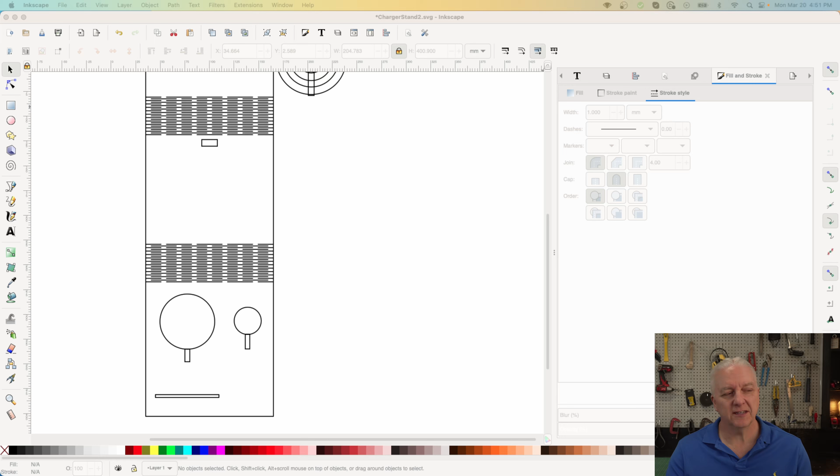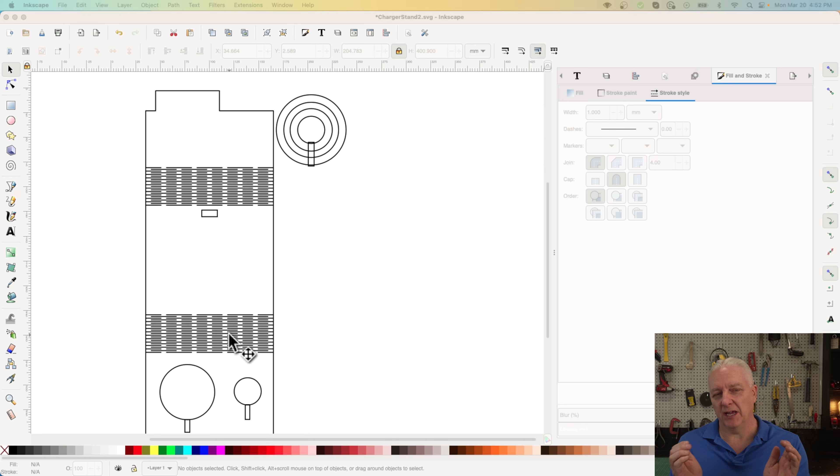This looks a little weird at the top here. This is an offset because I have my smartwatch on one side, on the right-hand side here in this case. The band kind of hangs down, and I didn't want to have this sticking out, because when you fold up the stand, this becomes the ledge that your phone sits on. So beside it is just empty space, and you'll see that when I put it together. There's a little hole in the back to run the cables through, and then there's two holes for the chargers.

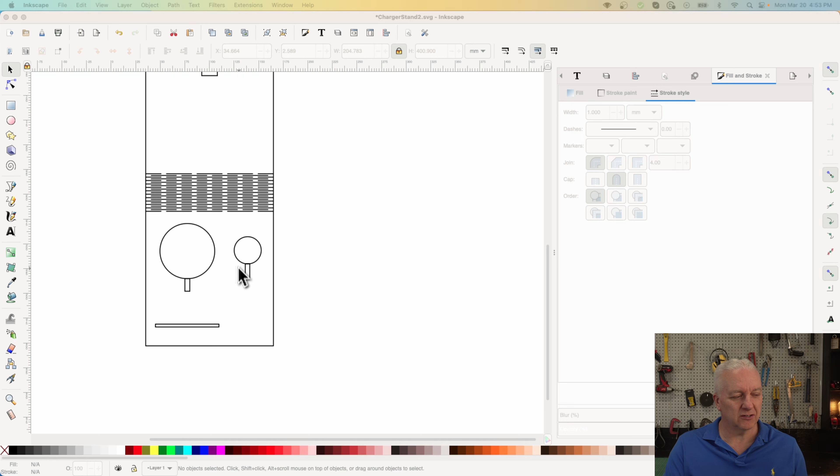In this case I'm using iPhone and Apple Watch chargers, but if you have another type of phone or another kind of watch, you should be able to modify this stand to suit. Maybe you just have it plug in the bottom, in which case maybe you put a hole here for your plug. Kind of finishing it off here is the slot that tab at the top fits in. So basically you bend at the top and you bend at the bottom, and then you slide it into the slot, and I'll show you how to put it together.

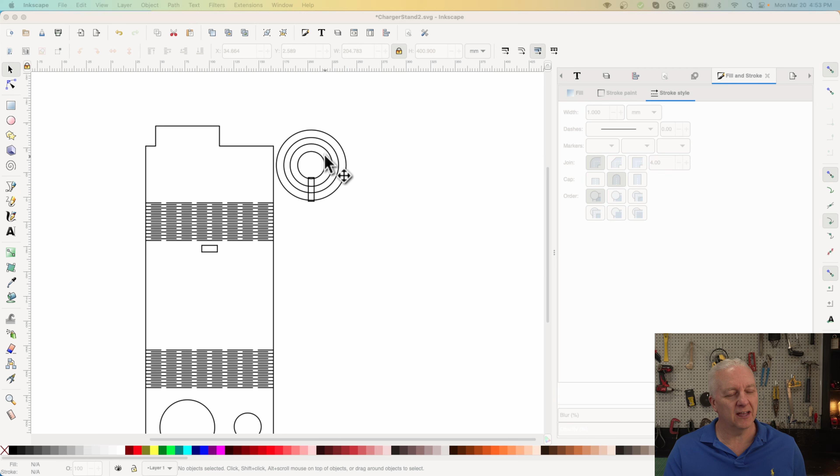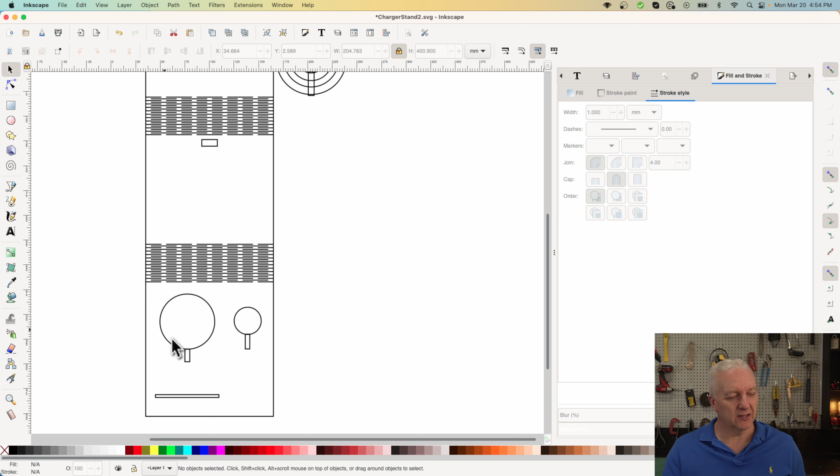Over on the side here I have just a couple of rings, and it's really the outside one and the inside ring that I care about. The one in the middle is really just waste, and then there's a rectangle here that gets cut out, and that makes a slot. And what those pieces do is they fit around the outside of these just to make them a little more robust, and then the slot matches the slot of this thing. And this is the same. They look like lollipops, but really these things get chopped out, and you get a circle with a little slot in the bottom of it. So that's the design, and it is pretty simple.

Now I did quite a bit of work. I can show you a pile of refuse. I normally cut these things out in cardboard first to try them. There's quite a pile of cardboard over on the side here, and it was so that I could get this hinge correct, so that it's close enough together that it's really flexible but still strong enough. And the reason I wanted it that way is because I don't want to make this out of wood, out of plywood. I want to make this out of acrylic.

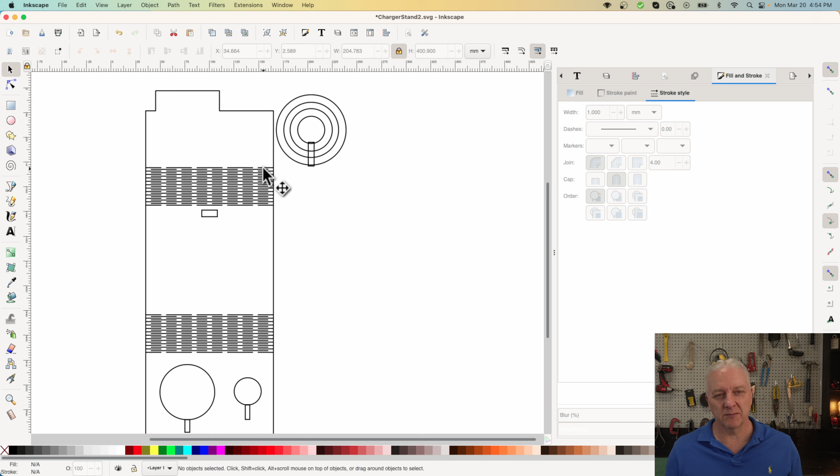And you can actually see behind me when we go back to full frame here that there is an acrylic one sitting there. It's a prototype, but I just really wanted to prove that it works. So in this project you can use a diode laser, you can use a CO2 laser, you can use wood, 1/8" plywood or 3mm plywood, or you can use 3mm acrylic. So really flexible design, and I'll cut it out here and we'll start putting it together.

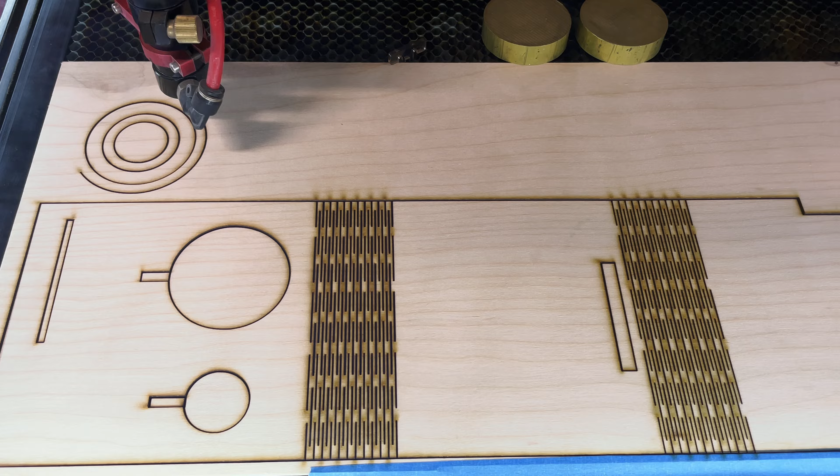All right, so I have my piece of wood that I cut for the stand, and you can see it's quite flexible. Be gentle on it though when you start. The way I cut this was the top, this was where the laser was facing, and this is the bottom. So what I'm going to do is use this as the inside of the stand, and what I did just for extra support is I added these 2 extra rings, and they'll just sit like that.

And rather than trying to glue or do anything, I just put some 3M tape on the back of them. You can glue them though. And all I'm going to do is peel that tape off. So I peeled the tape off, and now I'm just going to stick them right here, lined up with the hole in the base. And when I'm happy with it, I can just press it down. And same with the bigger one here.

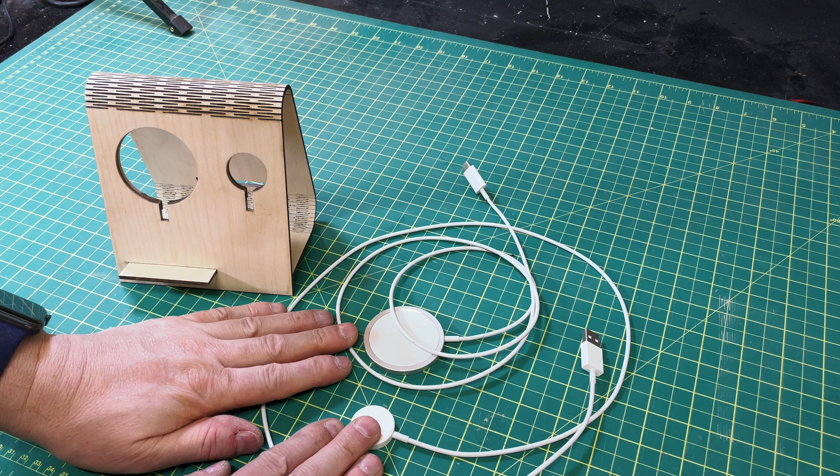Okay. And last but not least is to assemble the stand. Now, before you just go cranking this thing, start gently bending it when it comes off the laser, just to make sure that all the joints are cut. But once you do that, you'll find that it's quite flexible. And press it on, and it will look like that. So I have my 2 chargers here. I have my base set up.

And I'll start with the iPhone charger. And all I'm going to do is put it in the hole, and you can see I'm lining up the cable with the slot here. And this will be a pretty tight fit. Now, if it's too tight, you can just run a little sandpaper around the inside of the ring until you get a tight fit. And then you can take the cable and slide it through the hole in the back.

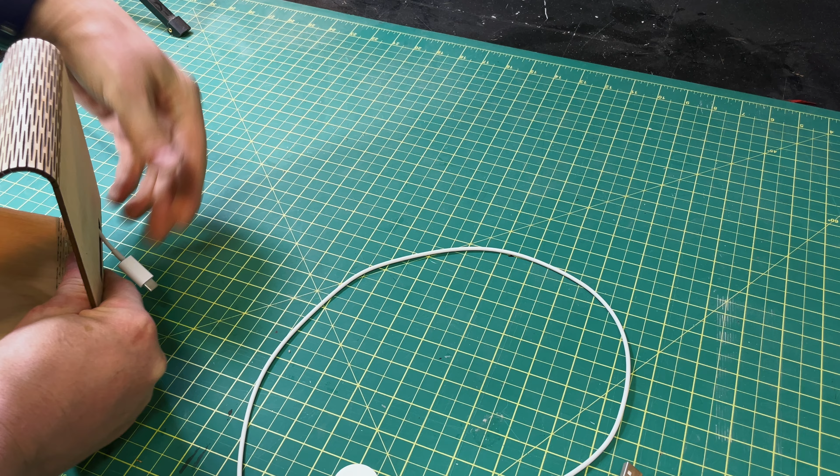And then we'll repeat this with my watch charger. And again, I'm pressing it in. It's a tight fit. And I wanted it to be tight so that I could take it out if I had to, if I'm traveling or something. But it's strong enough to stay in there so I don't have to glue it. And there you go. And you can just plug those into your charger.

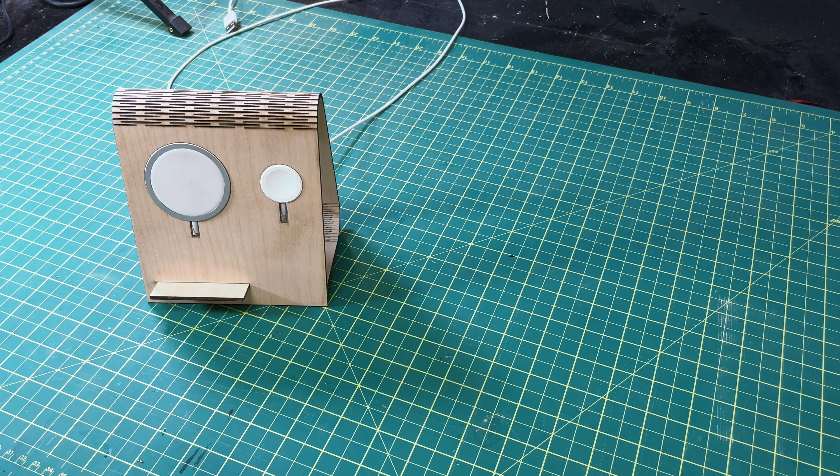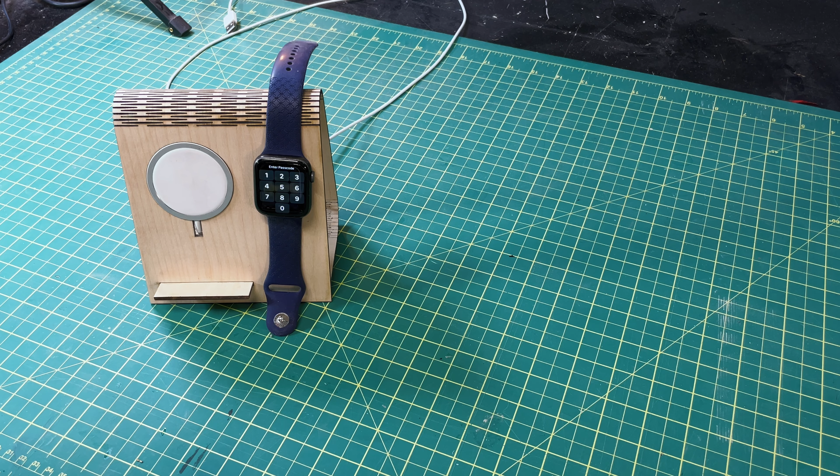Now, I can't use my iPhone to show you here, but I'll leave it in a photo later, but I can show you my watch. And all you got to do is stick it on there, and you're ready to go. Same thing with the phone. All right, so there we go. You can see this was a really easy project to put together. You can literally make one of these in about 10 minutes of laser work. So it comes together very quickly, and it's super simple to put together.

You really just have to fold a bunch of wood or acrylic into the right shape, and it will just fit together. There are those extra rings that you can put on the back, and again, I use 3M tape just because it's easy and it's instant, but you could also glue them if you want, and that just provides a little bit of extra strength to hold the chargers in. It may be optional if you don't want to have it, but I put it in just because I tend to abuse things.